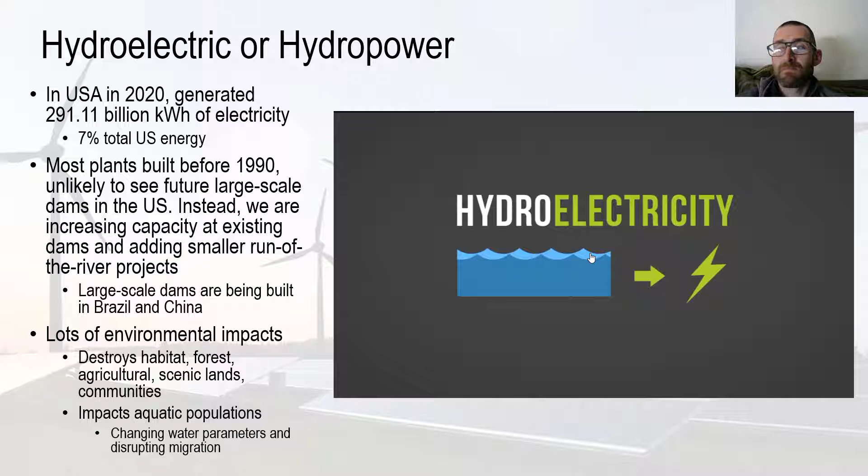Hydropower, or hydroelectricity, refers to the conversion of energy from flowing water into electricity. It is considered a renewable energy source because the water cycle is constantly renewed by the sun. One of the first uses of hydroenergy was for mechanical milling, such as grinding grains.

Today, modern hydro plants produce electricity using turbines and generators. The mechanical energy created by moving water spins rotors on a turbine. This turbine is connected to an electromagnetic generator which produces electricity when the turbine spins.

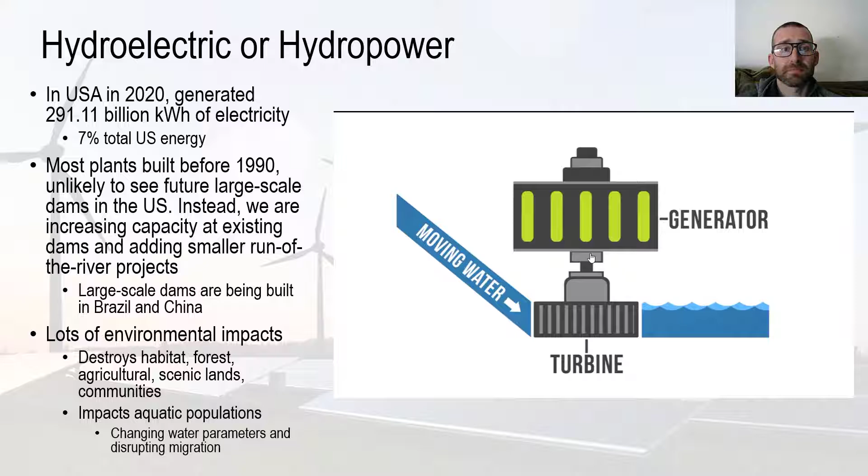There are two main types of hydroelectricity production: dams and run-of-river. Hydro dams utilize the potential energy from dammed water to produce electricity. A dam is a large barrier constructed to raise the level of water and control its flow. The elevation created by the dam creates gravitational force for turning the turbine when water is released.

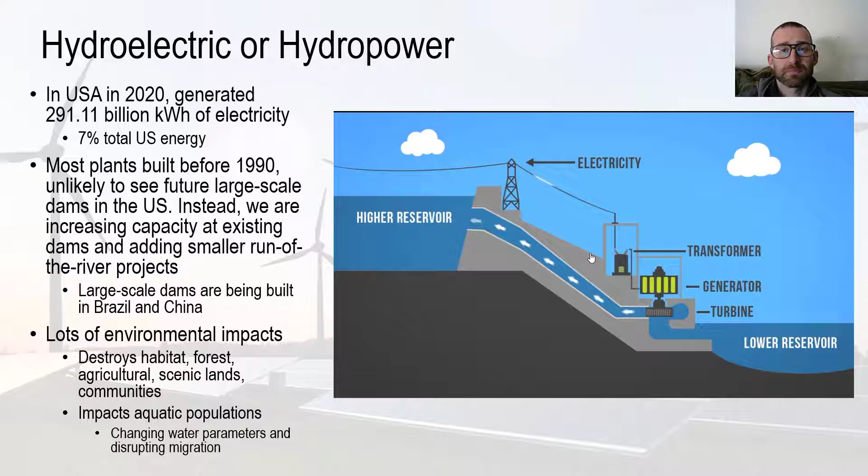Some dams also contain an additional reservoir at their base where water is stored to be pumped to the higher reservoir for release when electricity is in demand. This is referred to as pumped storage hydro.

The second form of hydroelectricity production is run-of-river hydro. Run-of-river still uses turbines and generators, but relies on natural water flow rates of rivers, diverting just a portion of the water through turbines. Because run-of-river hydro is subject to natural water variability, it is more intermittent than dammed hydro.

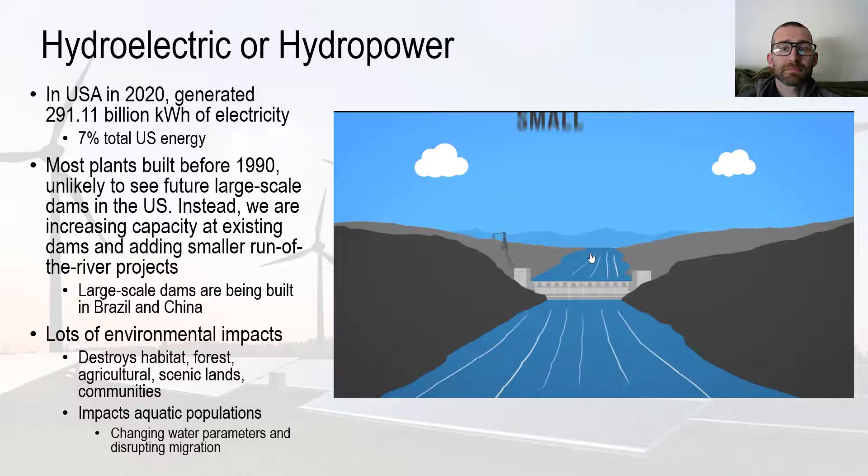There are various sizes of hydro plants that produce electricity: large hydro, greater than 30 megawatts; small hydro, 100 kilowatts to 30 megawatts; and micro hydro, less than 100 kilowatts. The Hoover Dam in the United States is a whopping 2,074 megawatts, which is enough to serve 1.3 million people.

Of all renewable energy sources, hydropower holds the largest share of worldwide electricity production.

Hydropower has several benefits. It is a cost-competitive form of electricity, even though the initial building cost can be high. It is quite reliable compared to other renewable options and pairs well with other sources as it can be used as baseload power. In some cases, dammed reservoirs can also help with flood control and be a reliable water supply for communities.

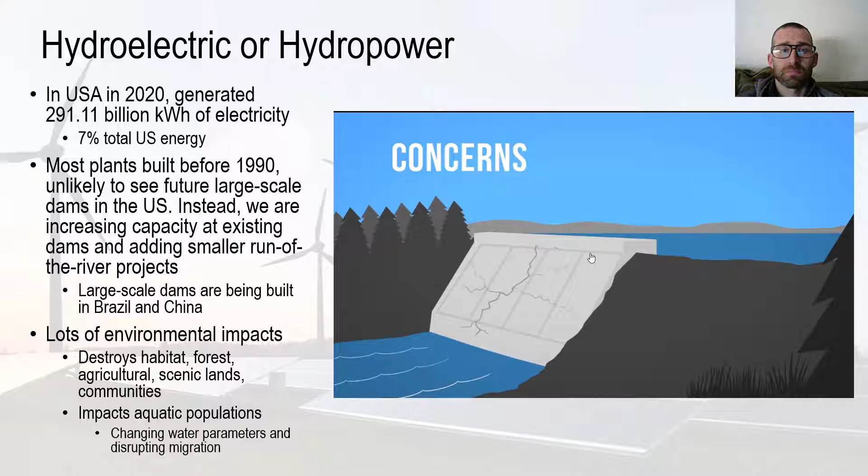There are also some concerns with hydropower, especially when it comes to large dams. Damming a river has a major impact on the local environment, changing wildlife habitats, blocking fish passage, and often forcing people in riverside communities to move out of their homes. In addition, dam failures can be catastrophic, claiming the lives of those living downstream.

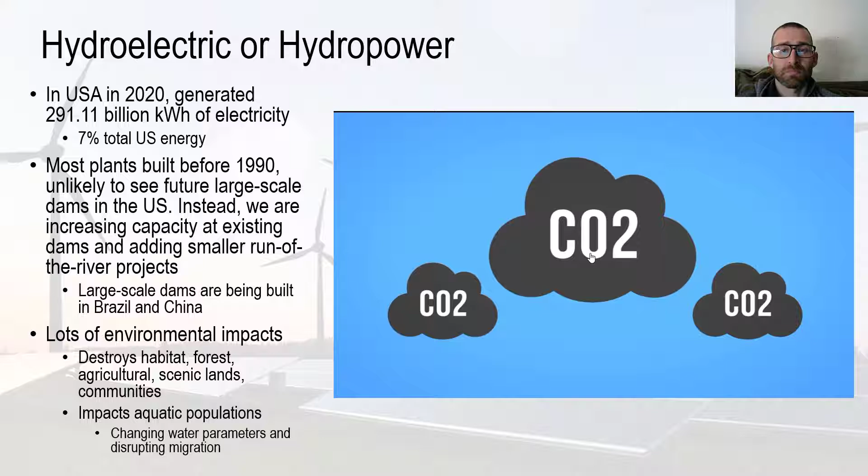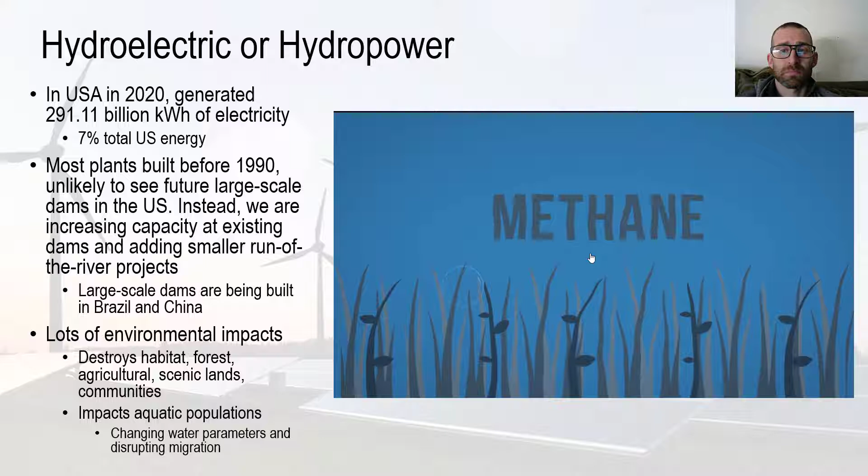Hydro plants are also not completely free of greenhouse gas emissions. As with most forms of energy, carbon dioxide emissions happen during construction, particularly due to the large quantities of cement used, and plant matter in the flooded areas makes methane, another greenhouse gas, as it decays underwater. That's hydropower.

Okay, so I thought that was a really good overview of hydropower or hydroelectric power. A couple things to note: essentially how it works, and this is going to be common through many of these methods, is that whole idea of creating electricity with an electrical generator. It's just, as you recall from the last lecture, moving magnets in that magnetic field, and that creates that electrical current.

You're going to see it with all of these. We already saw it with coal and natural gas and nuclear. And with a majority of these renewables, it's the same idea. We just need to come up with ways of spinning that turbine to create electricity.

So as the video mentioned, it's a couple of years old when this video was produced. Currently, hydropower in the U.S. accounts for about 7% of the total U.S. energy production. I think it was just surpassed by wind, so wind is a little bit higher now.

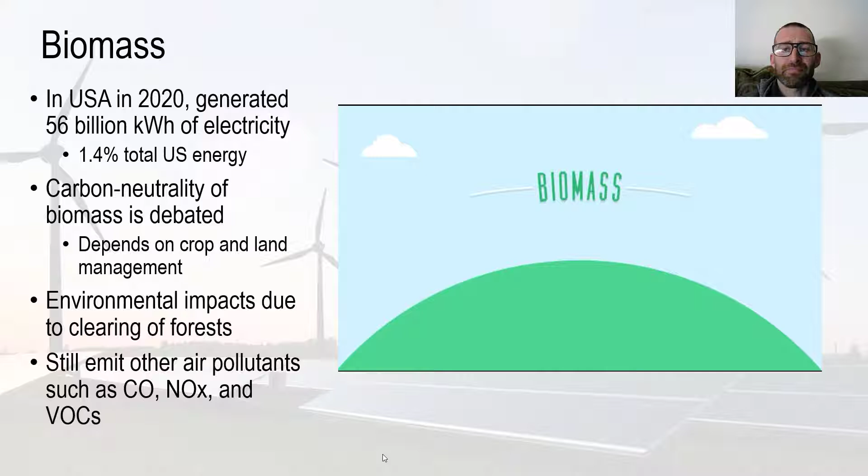It's been part of our lives since our ancestors learned to control fire. In fact, it's made possible by the sun, whose energy is absorbed by trees and plants through photosynthesis, and then released when organic matter is burned or decomposes.

First, there's plant waste. Wood scraps, sawdust, and crop waste can be collected from farms or manufacturers. The waste is burned to heat water. The hot water creates steam. The pressure of the steam spins a turbine. The turbine powers a generator. The generator creates electricity. Simple, really.

Next up, animal waste, also known as the problem of cow poop. The solution? Waste from farm animals can be collected in a large tank called a digester, filled with bacteria that eats the waste and converts it to methane gas. The methane is captured and burned to heat water and create steam. Sound familiar? Second verse, same as the first.

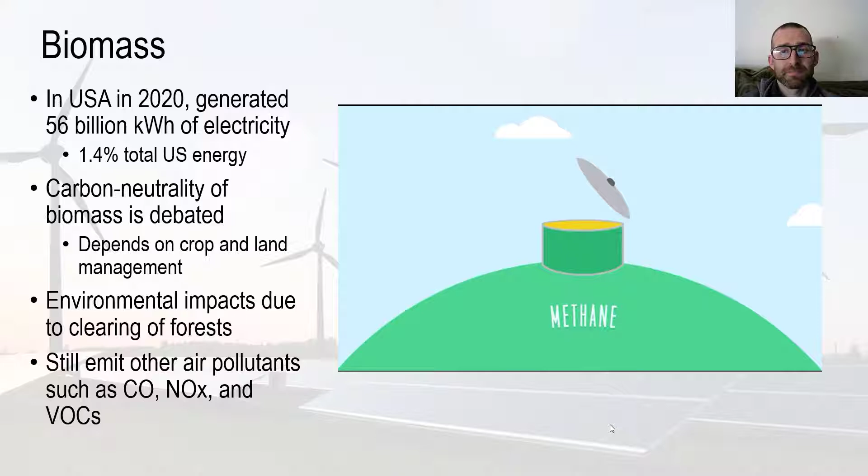This same principle can also be used to capture methane, a potent greenhouse gas with 25 times the heat-trapping ability of carbon dioxide, from landfills. Once a section of the landfill is closed off, pipes are run from the waste to collect the gas, which can then be burned to make electricity or heat.

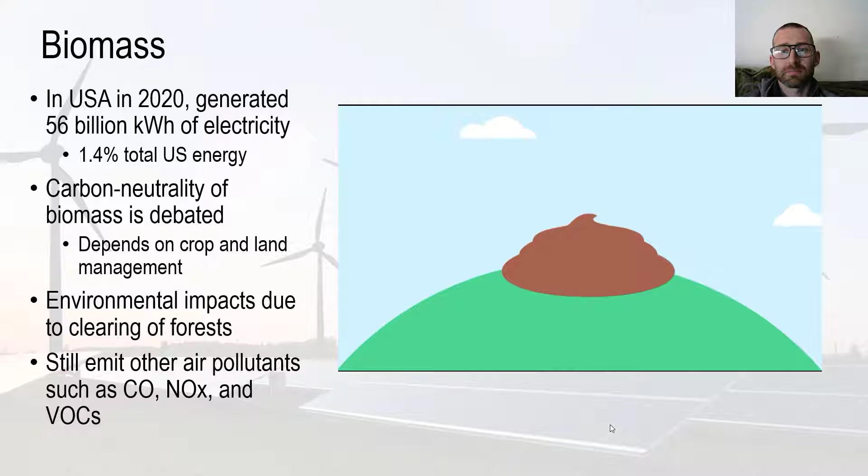Biomass may not be the prettiest form of renewable energy, and it needs to be used carefully and thoughtfully to protect ecosystems and prevent greenhouse gas emissions. But it can be a smart way to make use of waste. Power to the poop.

Okay, so biomass. Again, very similar parallels with the things that we've seen before, right? This is just essentially a different fuel source, same type of process. So instead of burning coal, we're burning waste, vegetable matter, wood, etc.

Now, biomass currently in the U.S., at least in 2020, was about 1.4% of our total U.S. energy production, so not a whole ton.

The carbon neutrality and the environmental friendliness of this technique is debated, and it really depends on your crop and land management. So if we are cutting down forests to be used for biomass, that's maybe not the best method or the most environmentally friendly method.

But this is, I think, a really good way of utilizing different waste streams. We produce a lot of waste in this country, and this could be a way of taking that waste that would otherwise just go to a landfill and utilizing it to create energy.

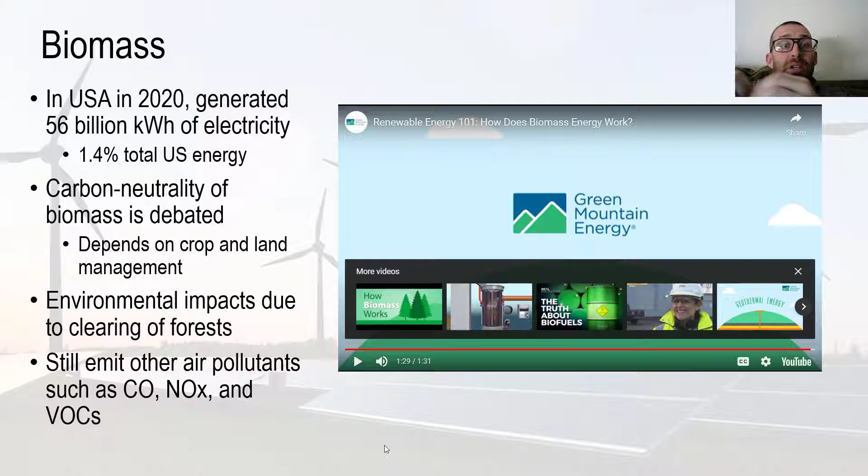Right now, we're still burning things, so we're still going to emit other air pollutants, like we see with burning other carbons, fossil fuels being carbon-based. But if we do this smartly and thoughtfully, this is a more environmentally friendly and could be a carbon neutral process of generating electricity.

No. And here's a quick video, we'll watch it real fast, of like I talked about. I think where we see a real benefit, or could see a real benefit with biomass, is for recycling and waste management. And here's just a little renewable example of that.

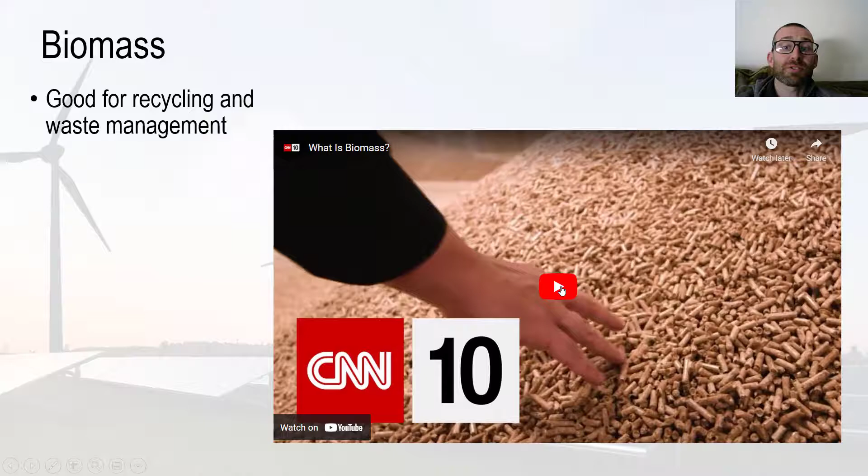Biomass generates less than 2%. Harvesting it, moving it, storing it, making sure it produces a consistent amount of energy, those have been ongoing challenges for scientists looking to use biomass. But the biomass industry is hoping to change that.

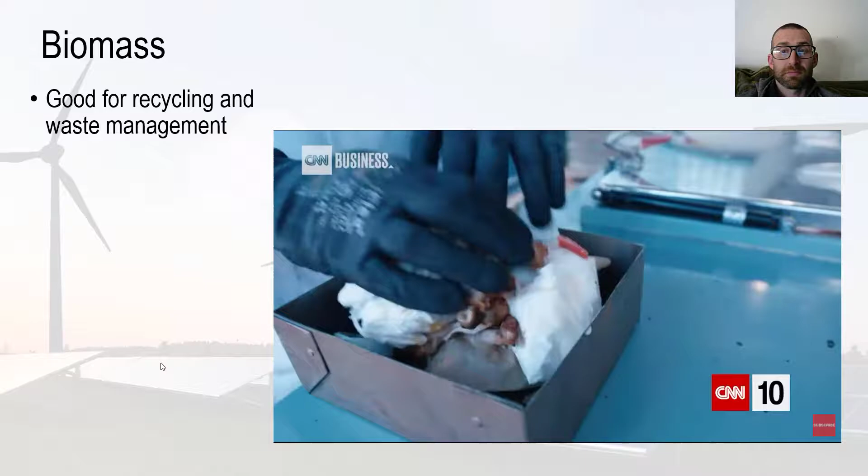There's so many non-utilized waste streams in this world. We have food waste, we have transportation waste. There are endless amounts of byproducts that are currently not utilized. What if you could power your home and live completely off the grid by just using your own trash?

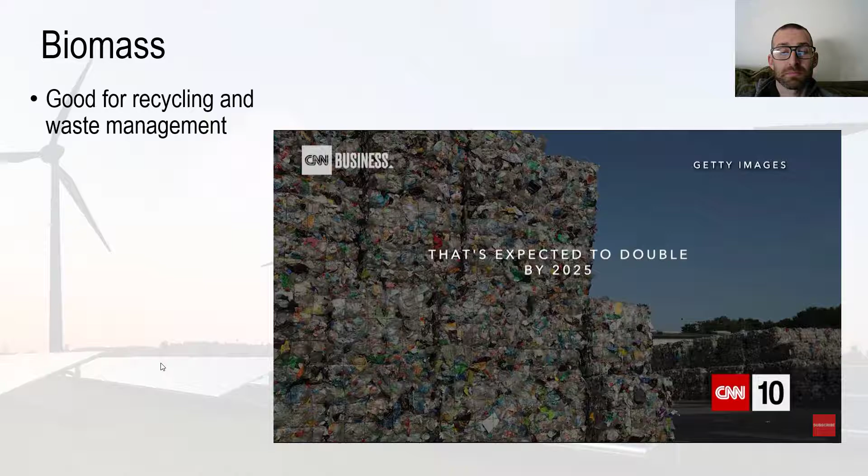Each year, over 1 billion tons of solid waste is produced globally. That's expected to double by 2025. And of the 8.3 billion metric tons of plastic produced worldwide, only 9% is recycled. But to this German startup, our trash is their treasure.

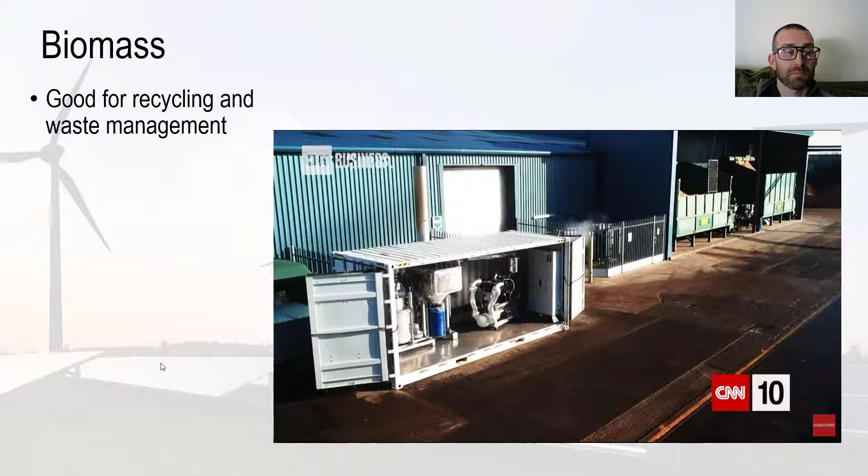The initial vision that we had was to build a power plant that is truly mobile, that it can convert all the waste and turn it into clean energy right on site. Entrade's power plants can fit entirely inside a 20-foot shipping container and mainly run on biomass. Biomass is a renewable organic resource that comes from plants and animals and can be turned into fuel.

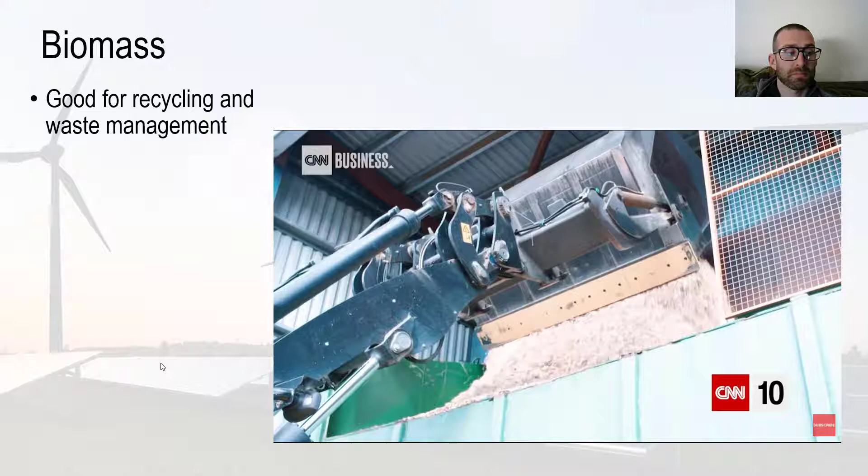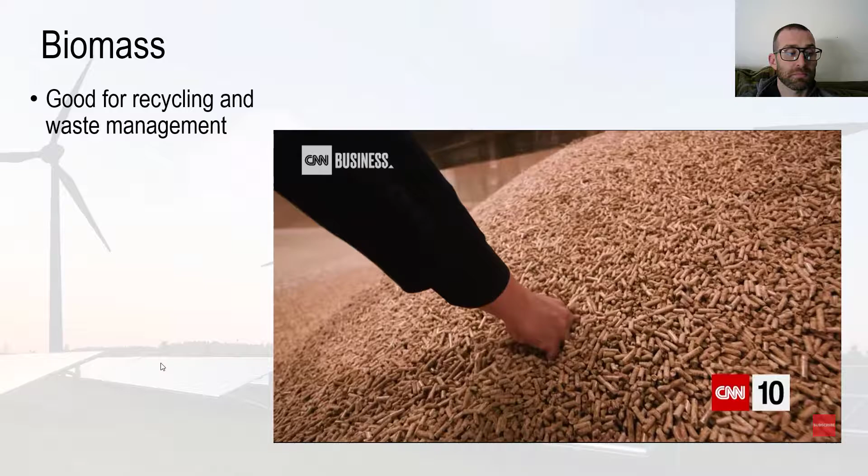Uhlig and his team work to identify local waste streams. Anything from manure to discarded lumber to yard trimmings, and even peanut shells can do the trick. We crush it, we dry it, and then we pelletize it. These biomass pellets are what Entrade's power units run on. The company has also developed the technology to use non-organic waste as fuel.

By taking plastic that would otherwise end up in landfills and combining it with other green waste, they claim their units can produce enough electricity to power homes, neighborhoods, and factories. We put it into our reactor, and it only stays there for a few seconds before it totally converts into a natural gas replacement.

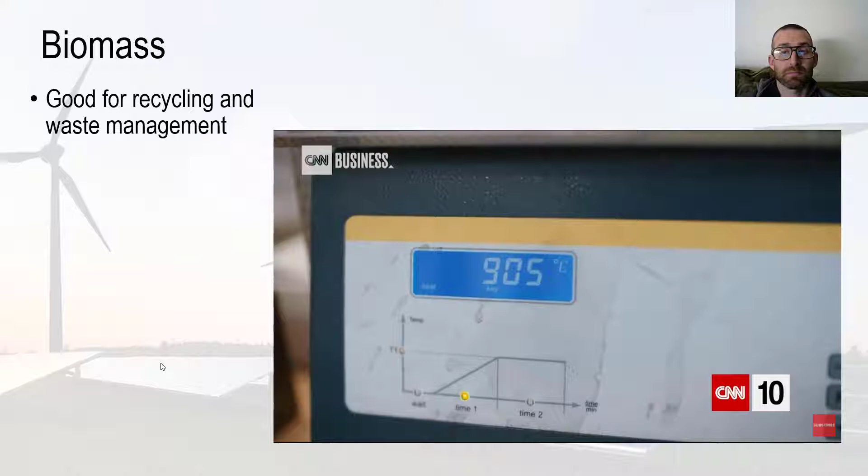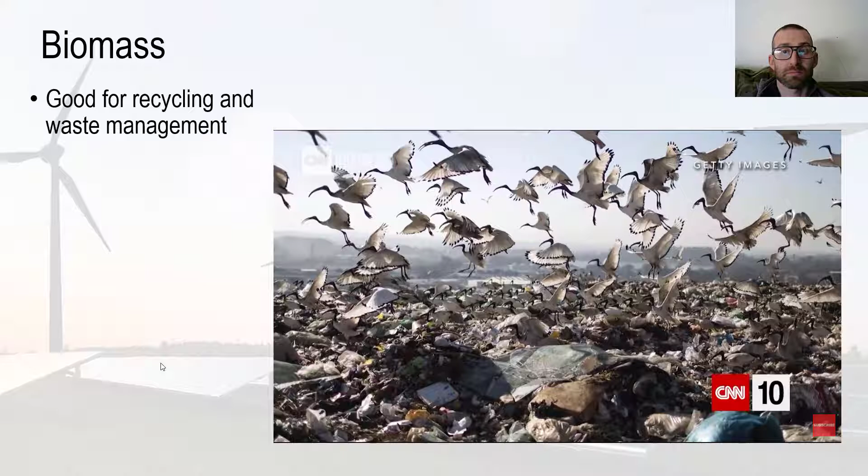It's a process called gasification. When plastic goes into a small reactor, it burns at extremely high temperatures, breaking down its polluting particles. The result is a hot gas that is then used to create electricity. Entrade sees potential in countries dealing with large amounts of plastic pollution. But figuring out the right mixture of plastic and biomass can be complicated and is still being tested.

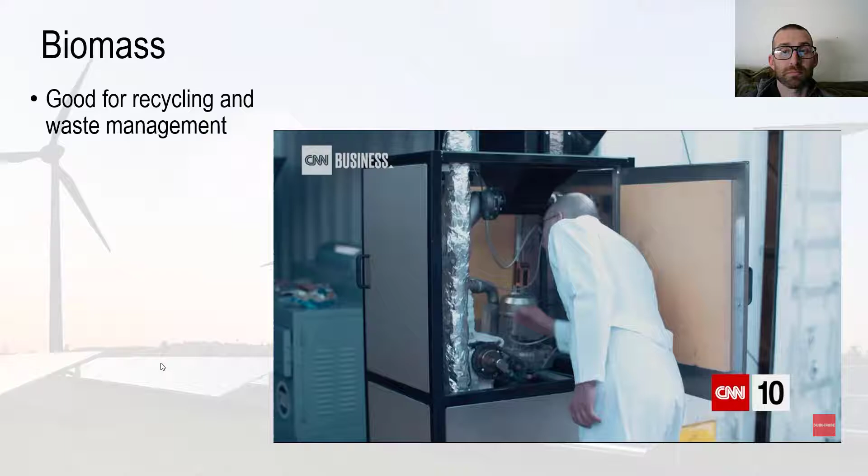The company wants to take their mobile power units one step further. Their newest unit is a mini power plant about the size of a fridge. We were always thinking of this power unit you can bring to the middle of nowhere, plug it in, use all the waste you find around it, pelletize it, and you have a complete power supply on site. I can see many people in farmhouses all over the world just putting this next to their kitchen and generating their own power from the waste that they're currently throwing away.

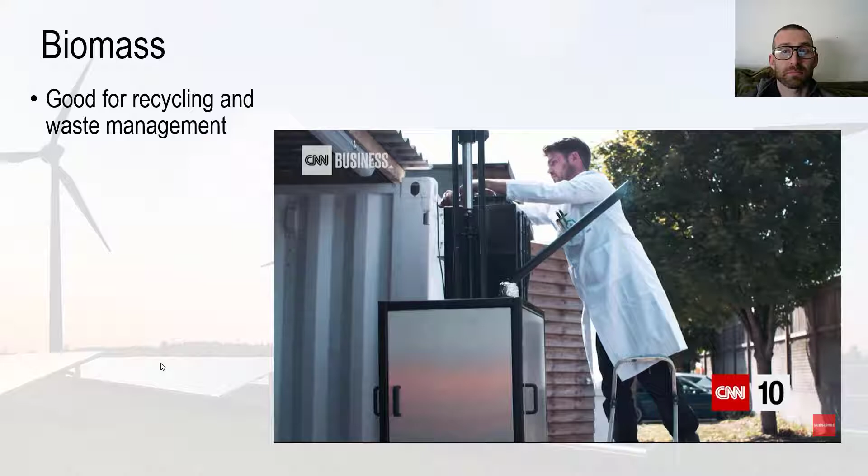But are these mini units as easy to use as they seem? If you look at the bags of pellets that we produce here, we need about 2 to 3 bags per day, so you can actually fill it by hand in the morning and have a complete power supply around the clock. That's a lot of pellets.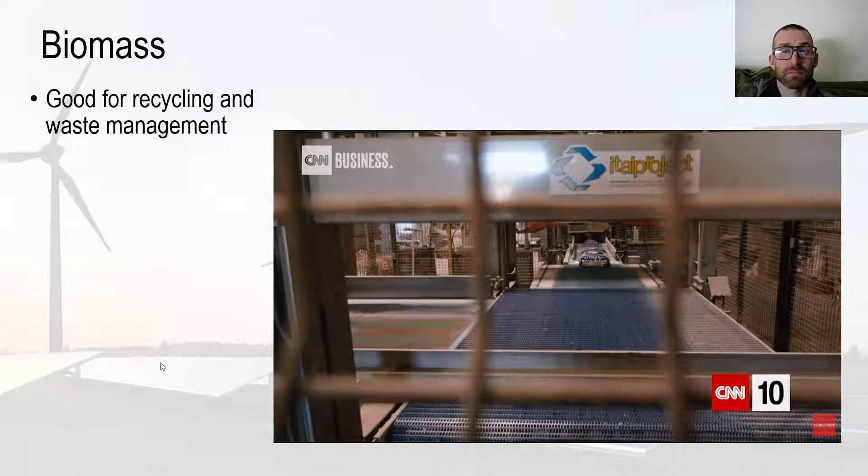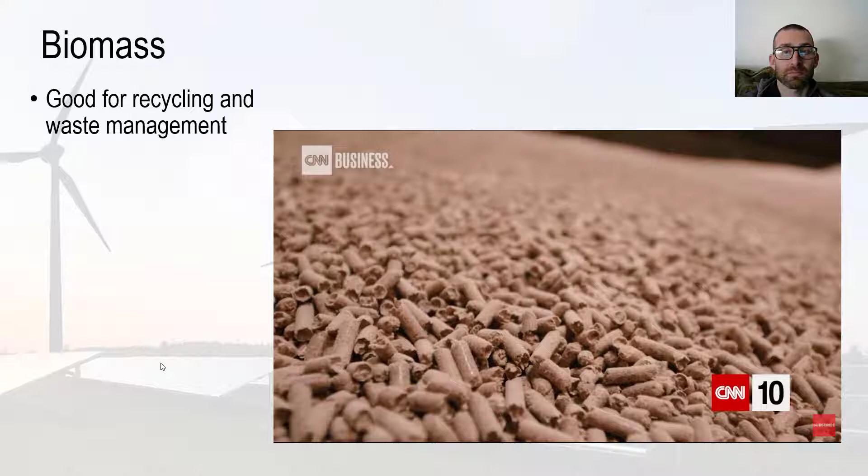Entrade's off-the-grid vision is still in its early phases. Questions like how much energy it would take for someone to actually make these pellets at home still remain. The company envisions communities combining their green waste and making their own biomass fuel.

They're also working to make these things affordable. The 50 kilowatt unit that you find in a big container was initially about $5 million to build. We have brought this down to a retail price of $250,000. As the production numbers go up, we think we can offer this for the price of a small car.

Entrade hopes that mini power plants like these could change the way cities and towns source their electricity, making them self-sustaining, and in some cases, cleaner. You're going to have communities processing their own waste using its electricity, and it's totally going to revolutionize the way we're going to live.

Kind of neat, right? So I thought that was cool.

Again, I think as they kind of touch on, where biomass could be really great is as this waste management process or technique. And really what you see here starts to touch on why we need to update our grid.

Where most people involved in energy, scientists, policymakers, etc., see things going in the future with energy is instead of having our current system where we have these large-scale power plants that are producing the majority of our energy and our electricity, and then that's getting distributed, we're going to have more of these smaller little microgrids.

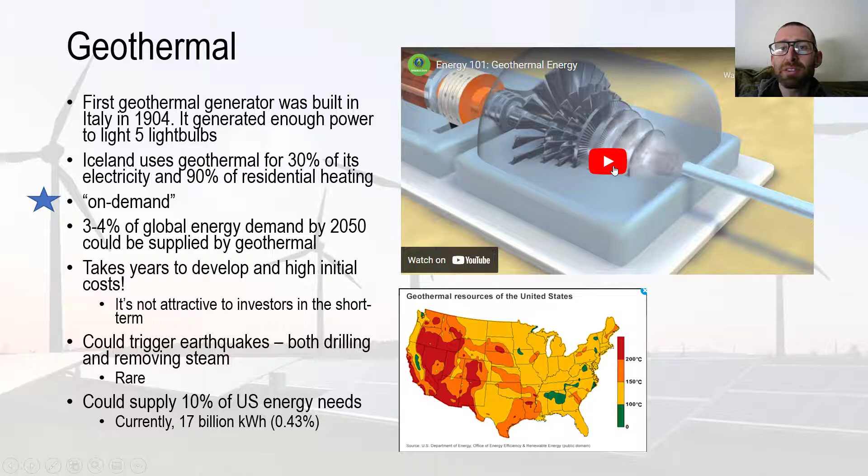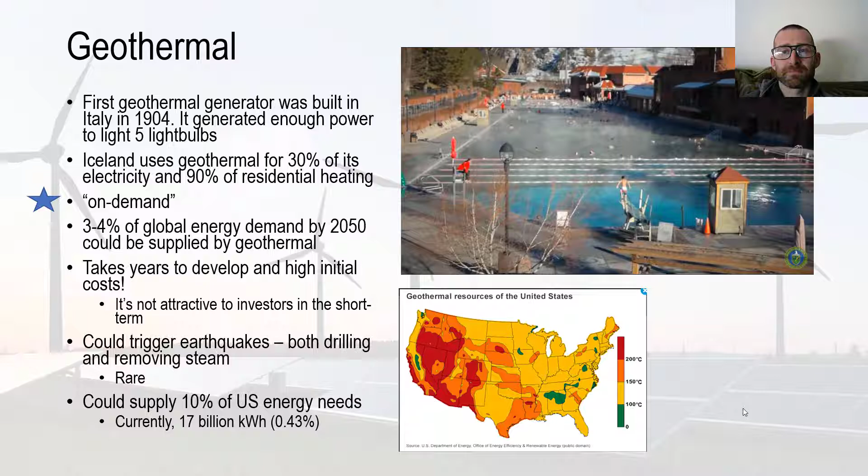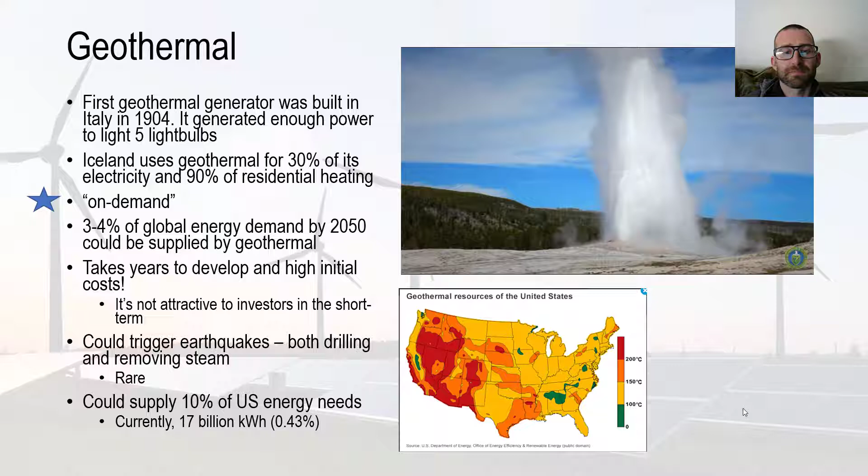You may have relaxed in a natural hot springs pool, or seen the Old Faithful geyser blasting hot water into the air in Yellowstone National Park. But have you ever thought of where all that heat comes from? Well, it comes from deep beneath the surface of the Earth, and it's called geothermal energy. And we can use it to generate clean, renewable electricity.

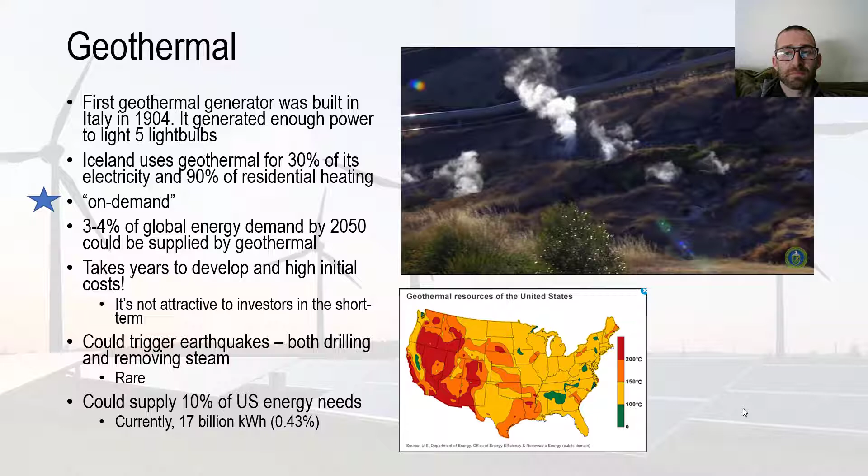Okay, here's how geothermal works. Heat from the Earth's crust warms water that has seeped into underground reservoirs. In some places, when water becomes hot enough, it can break through the Earth's surface as steam or hot water. This usually happens where the Earth's crust, or plates, meet and shift. In the past, taking advantage of geothermal energy was limited to areas where hot water flowed near the surface. But as geothermal technologies advance, we can leverage even more of these natural, renewable energy sources.

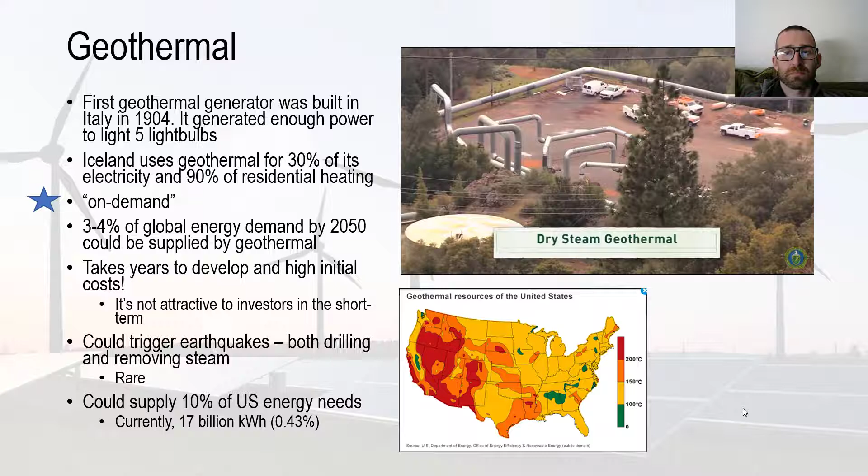Engineers have developed a few different ways to produce power from geothermal wells drilled into the ground. Have a look at this. It's a dry steam geothermal power plant, and it's the oldest type of geothermal technology used today. Underground steam flows directly to a turbine to drive a generator that produces electricity.

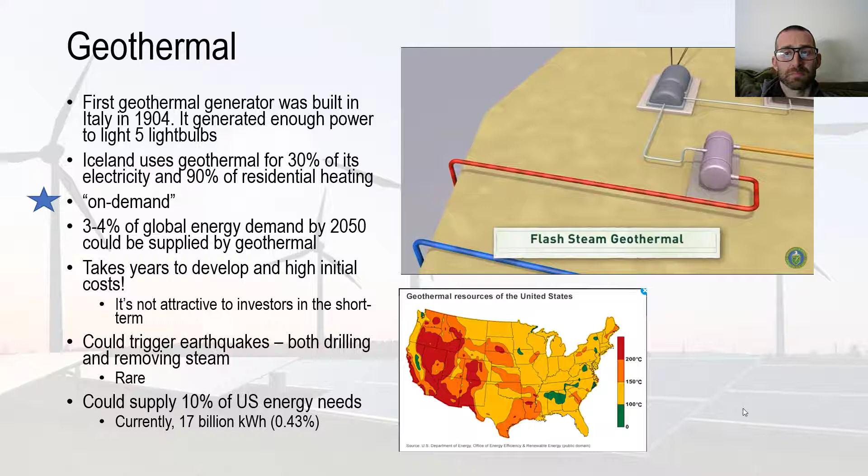Pretty straightforward. Another geothermal technology is called a flash steam power plant. A pump pushes hot fluid into a tank at the surface, where it cools. As it cools, the fluid flashes, or quickly turns into vapor. The vapor then drives a turbine and powers a generator.

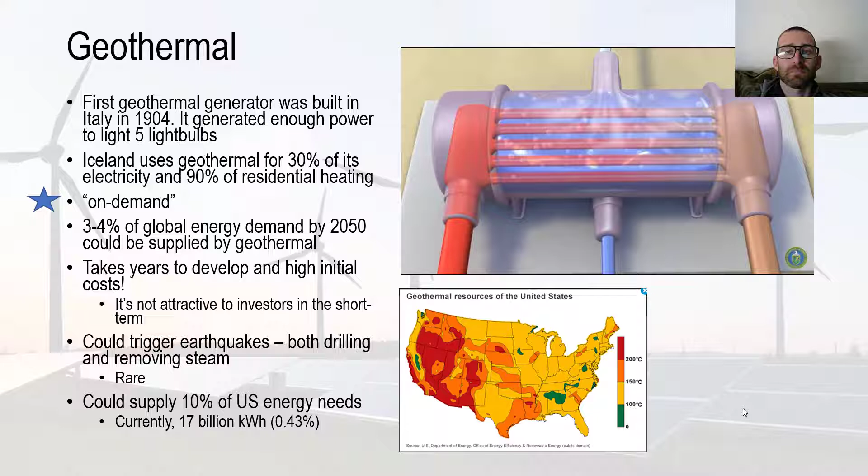A binary cycle plant works differently. It uses two types of fluid. Hot fluid from underground heats a second fluid, called a heat transfer fluid, in a giant heat exchanger. The second fluid has a much lower boiling point than the first fluid, and so it flashes into vapor at a lower temperature. When the second fluid flashes, it spins a turbine that drives a generator.

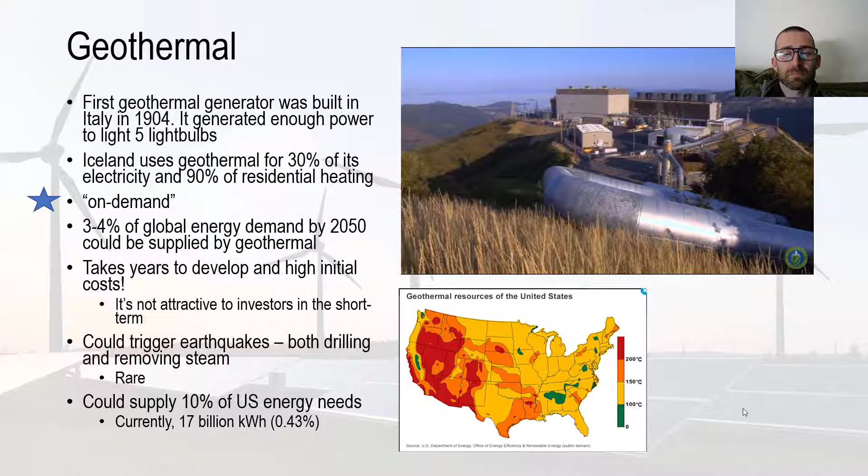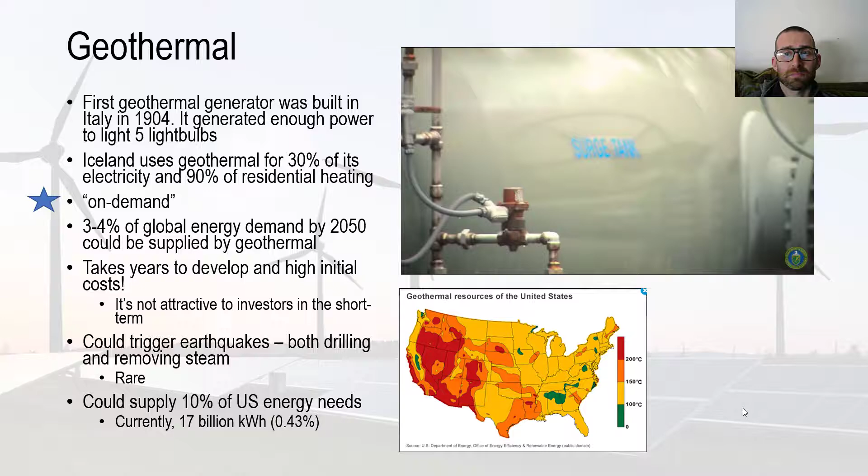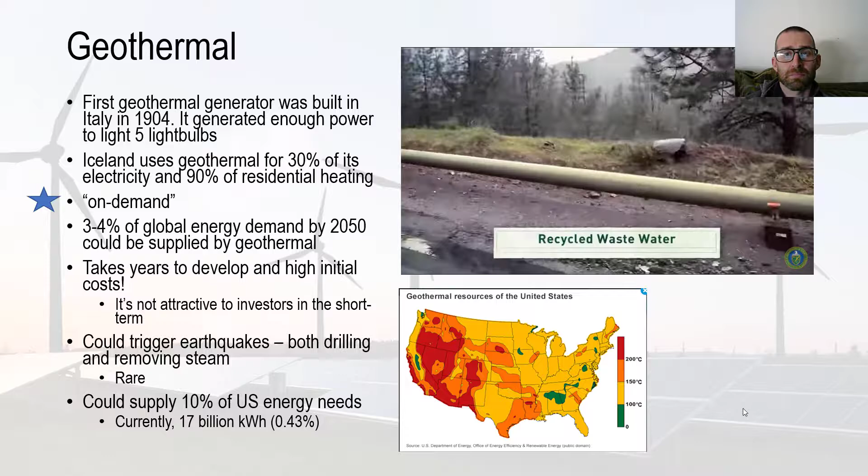The environmental benefits of this clean, round-the-clock, renewable energy source are substantial. Low emissions, small physical footprint, and minimal environmental impact. The few byproducts that can come up are often re-injected underground. Geothermal energy can also help recycle wastewater. In California, wastewater from the city of Santa Rosa is injected into the ground to generate more geothermal energy. Some plants do produce solid waste, but that solid waste may contain minerals that we can remove and sell, which lowers the cost of this energy source.

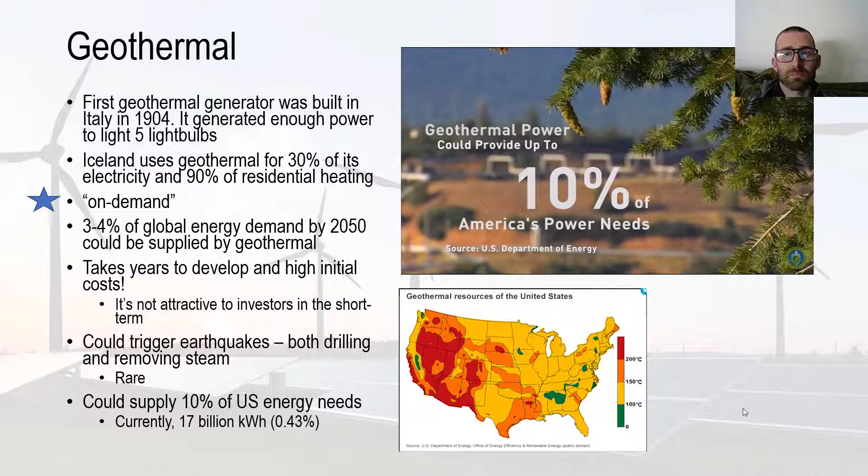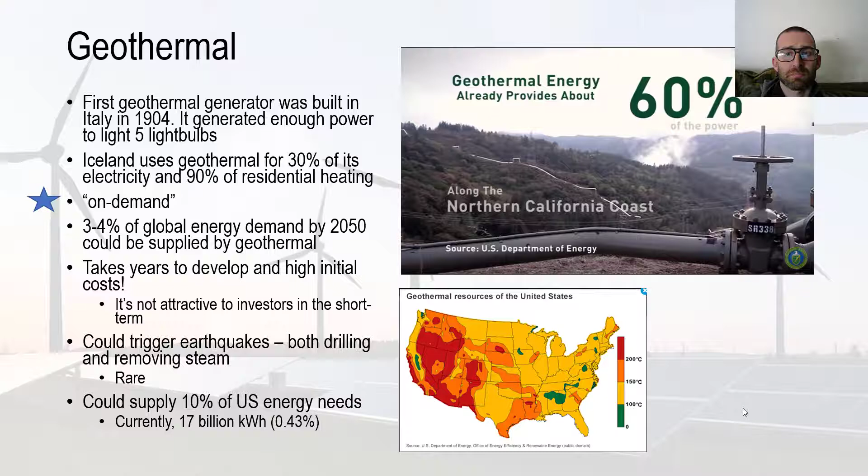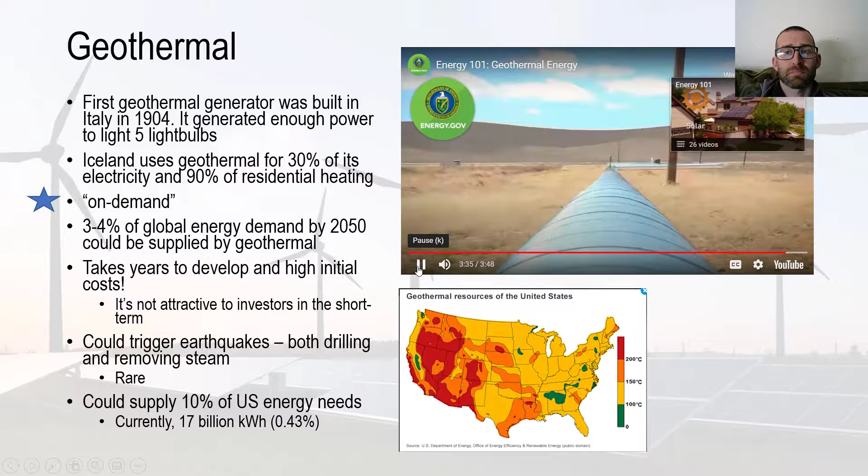The U.S. Department of Energy estimates that untapped geothermal resources in the United States, if developed, could supply the equivalent of 10% of today's energy needs and cut our dependence on fossil fuels. In fact, electricity generated by geothermal energy already provides about 60% of the power along the Northern California coast, from the Golden Gate Bridge to the Oregon state line. Geothermal energy, helping to push America toward energy independence and a clean, renewable way to meet our growing energy demands.

Okay, so that's geothermal. Again, same idea, right? We just need to create steam, or we need to turn that turbine in one way or another. Now, with geothermal, instead of actually burning materials, burning fossil fuels, or burning biomass, we're using the natural heat of the earth to create that steam, to spin that turbine. I think it's a really neat form of energy generation.

The first geothermal generator was built in Italy in 1904, and it was able to power 5 light bulbs. So there's been a great increase in the ability of this technique to create energy since that first generator back in the early 1900s.

And this is, like they said, in California, it is used widely in certain areas. In Iceland, they're probably the most well known for their geothermal energy. Iceland uses geothermal, and that accounts for about 30% of their electricity generation and 90% of their residential heating. They really went kind of all in and promoted this method.

This really followed the 1970s. Before they decided to switch or go for geothermal, they were primarily fossil fuel based and oil based, and there was an oil shortage in the 70s where they couldn't get any to Iceland. It was a worldwide oil shortage. Iceland couldn't get any oil, and they realized they needed to shift their processes and how they went about creating energy. They decided to go geothermal, taking advantage of the natural geology in the area. And it's been a great success, right? They are well known for producing geothermal energy.

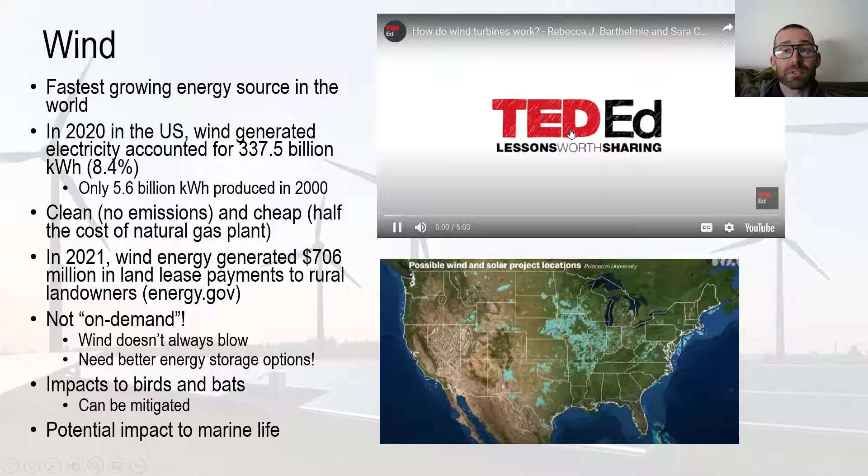Every 24 hours, wind generates enough kinetic energy to produce roughly 35 times more electricity than humanity uses each day. And unlike coal or oil, this resource is totally renewed each day. So how can we harness this incredible amount of energy? And is it possible to create a world powered entirely by wind?

The basic principle of wind energy is simple. A series of sails or blades mounted around a rotor catch the wind and translate its kinetic energy into rotational energy. Traditional windmills use that rotational energy to grind wheat or pump water. But in modern wind turbines, it turns a generator that creates electricity.

This conversion from wind to rotational energy to electricity has defined wind turbines since their invention in the late 19th century. And there are three primary factors that determine just how much energy they can produce: the size and orientation of the blades, aerodynamic design, and the amount of wind turning the rotor.

First up, blade orientation. Wind turbines can be designed with their rotor on a vertical axis or a horizontal axis. Vertical blades can pick up wind coming from any direction, but with much less efficiency than horizontal axis rotors. Horizontal designs allow blades to capture the wind's full force by tracking the wind's direction and turning to face it. This turning process is called yawing, and older windmills achieved it through manual monitoring. Today, wind sensors and computer systems automatically adjust the blades with expert precision to capture as much energy as possible.

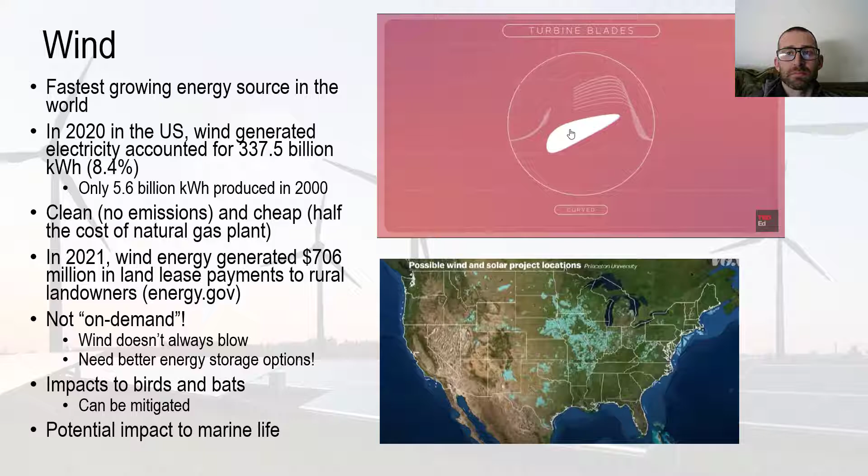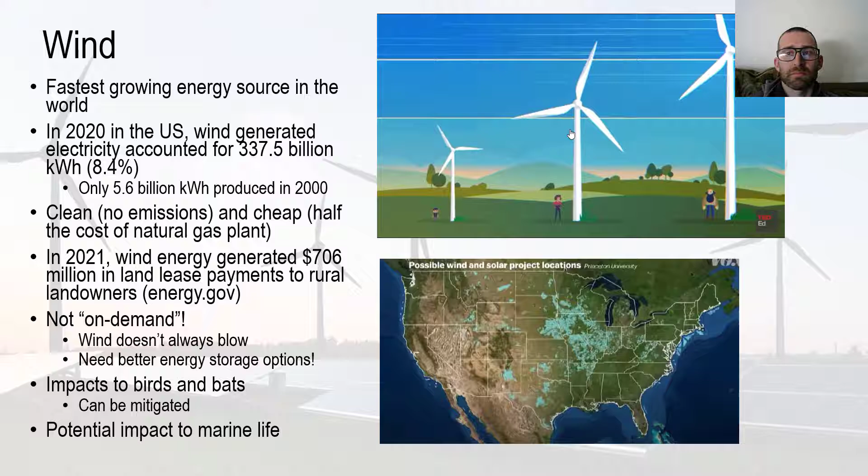Made of fiberglass and resin layers, these blades are strong enough to operate through rain, lightning, and blistering sunlight for over 20 years. Even with aerodynamic blades and a horizontal rotor, a wind turbine can only capture wind if it's in a windy environment. Wind speeds typically increase the higher into the atmosphere you travel. So today, most turbines are well over 100 meters tall, with equally large rotor diameters. A turbine of this height and size can capture a huge amount of wind, generating enough electricity every year to power 750 American homes.

A wind farm of 200 similarly sized turbines could power over 150,000 American homes, or twice as many European homes, for an entire year. Offshore wind farms contain an even greater number of even larger turbines. In 2019, the largest wind turbine ever built began operating off the coast of the Netherlands. With a rotor diameter of 220 meters, just one of these turbines can meet the annual power needs of 16,000 European households. Despite its amazing potential, wind energy still faces challenges.

Wind may be a free and unlimited fuel, but no matter how large or efficient a turbine is, there's a mathematical limit to how much wind it can convert into electricity. German physicist Albert Betz calculated that since some wind must remain to keep the blades spinning, a turbine can only ever capture 59.3% of the wind's energy.

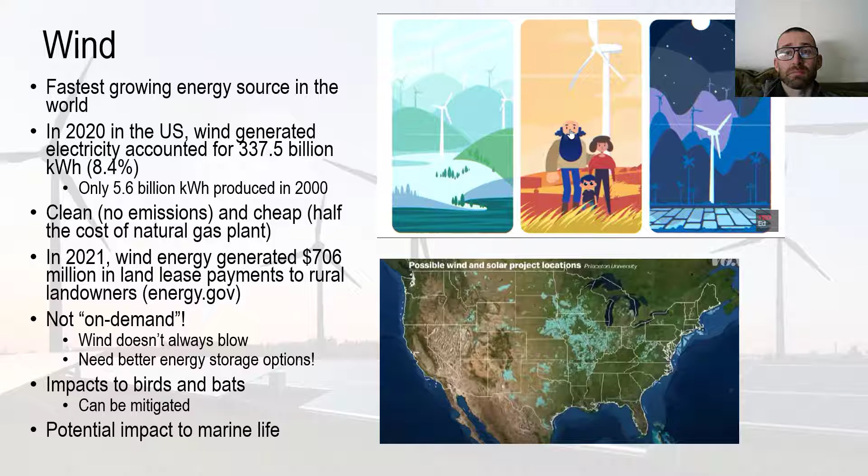Additionally, some people feel turbines disrupt natural scenery, and wind energy's intermittent availability can make it difficult to integrate into electrical grids. But even with these challenges, modern wind turbines have made wind energy the most efficient and inexpensive source of electricity. Wind turbines already provide essential energy for communities around the world, and for many farmers, hosting a wind turbine can be a reliable source of additional income. With continued improvements in wind forecasting, electrical grid infrastructure, and energy storage, wind power might blow away all our energy problems.

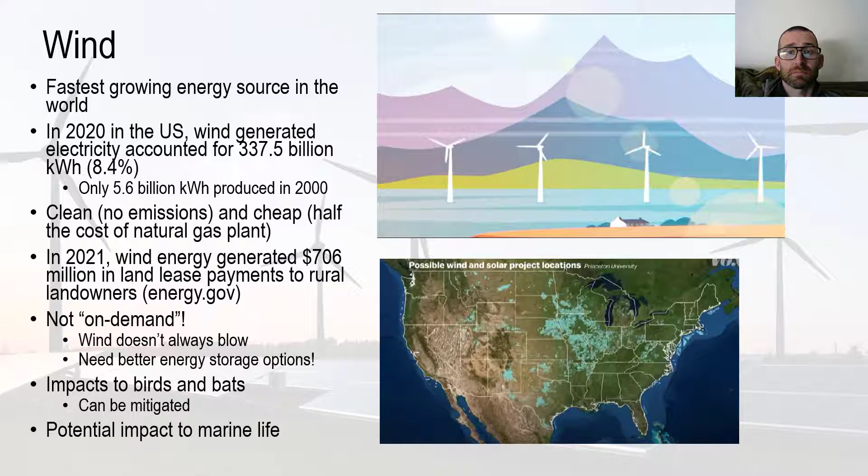Next up, learn how solar...

Okay, so that's wind. It is the fastest growing energy source in the world, right?

And for good reasons that were touched on in that video. It is clean, right? There are no emissions associated with wind power, and it's cheap. The costs of wind have decreased dramatically. The cost of developing a wind farm is about half the cost of building a natural gas plant, so it's cheaper than all these other sources of energy generation.

And because of that, we are seeing this huge increase in wind development. In 2020, in the U.S., wind generated about 8.4% of our energy capacity, or about 337.5 billion kilowatt hours. Only 20 years ago, that number was 5.6 billion. So a huge increase in the amount of wind and electricity that we're generating through wind.

Another benefit, besides it being clean and cheap, is that it also can be a source of income, especially for rural areas. If you look at possible wind and solar locations, a lot of them are out in the Midwest, traditional farm country. Well, here's an additional form of income now. If you can utilize some of your land and lease it for these wind projects, it'll generate extra income for you. In fact, in 2021, wind energy generated $706 million in land lease payments to rural landowners. So another advantage of wind.

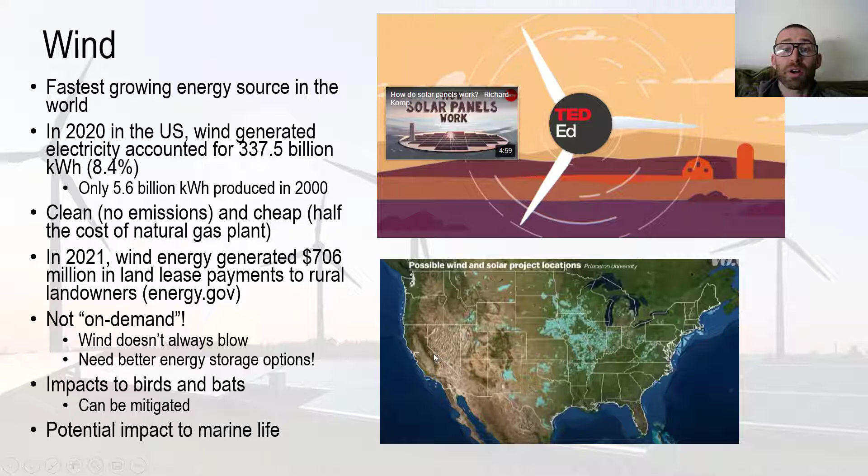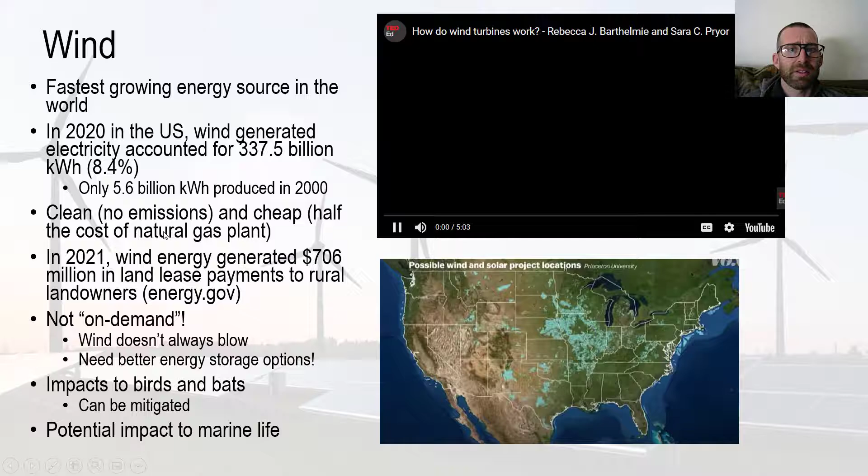And that is going to bring us to solar energy. Our last renewable, solar, and also probably right behind wind in terms of growth. Before we watch the video, I'll just touch briefly. It accounted for about 8.4% of our... oh, that's still the wind, that should be changed. I'll have to look it up and tell you how much electricity it accounted for. Oh, this is correct, it's just the 8.4% is wrong. Oh no, I can't change it while I'm on here.

Okay, so in the US, solar power or solar photovoltaic power generated 90.9 billion kilowatt hours of electricity. I'm not sure what percentage that is, but again, this is a big increase compared to only a couple of years ago. In 2010, only about 10 years ago, we only produced 1.2 billion, and going back 20 years ago, it was about 0.5. So this is rapidly growing, just like wind, a rapidly growing energy source.

So let's watch our video, and then I'll touch on a couple more things.

The Earth intercepts a lot of solar power, 173,000 terawatts. That's 10,000 times more power than the planet's population uses. So is it possible that one day the world could be completely reliant on solar energy?

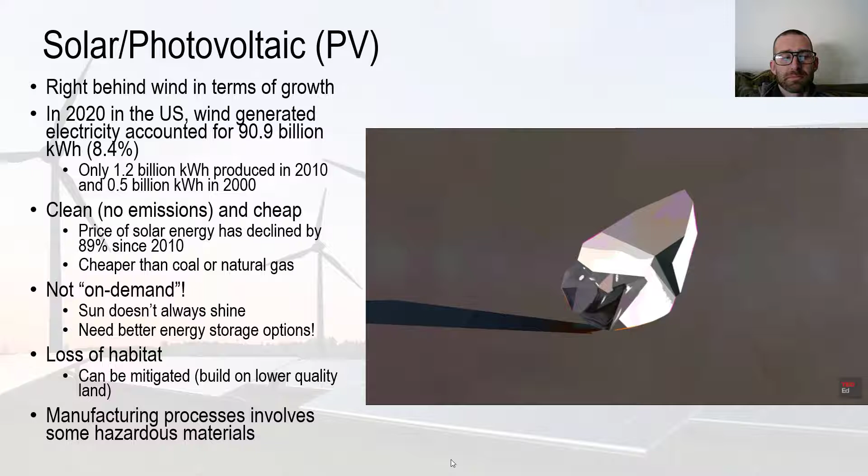To answer that question, we first need to examine how solar panels convert solar energy to electrical energy. Solar panels are made up of smaller units called solar cells. The most common solar cells are made from silicon, a semiconductor that is the second most abundant element on Earth. In a solar cell, crystalline silicon is sandwiched between conductive layers. Each silicon atom is connected to its neighbors by 4 strong bonds, which keep the electrons in place so no current can flow.

Here's the key: a silicon solar cell uses 2 different layers of silicon. N-type silicon has extra electrons, and P-type silicon has extra spaces for electrons, called holes. Where the 2 types of silicon meet, electrons can wander across the p-n junction, leaving a positive charge on one side and creating negative charge on the other.

You can think of light as the flow of tiny particles called photons shooting out from the sun. When one of these photons strikes the silicon cell with enough energy, it can knock an electron from its bond, leaving a hole. The negatively charged electron and the location of the positively charged hole are now free to move around. But because of the electric field at the p-n junction, they'll only go one way. The electron is drawn to the n side, while the hole is drawn to the p side.

The mobile electrons are collected by thin metal fingers at the top of the cell. From there, they flow through an external circuit, doing electrical work like powering a light bulb, before returning through the conductive aluminum sheet on the back.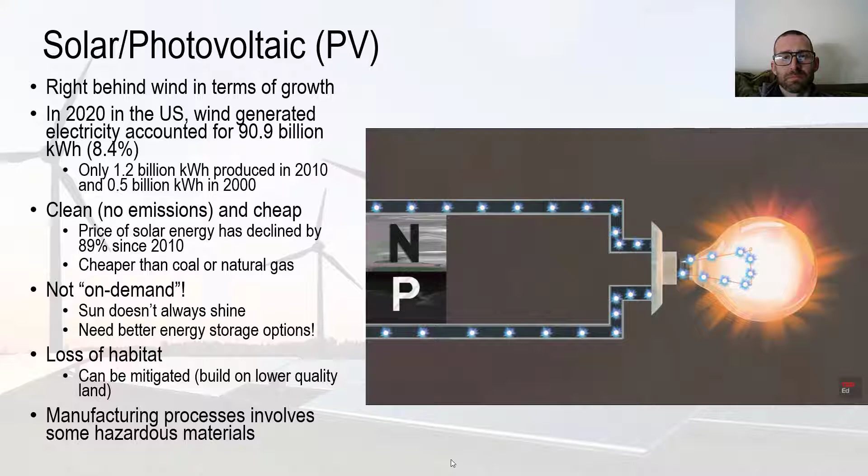Each silicon cell only puts out half a volt, but you can string them together in modules to get more power. 12 photovoltaic cells are enough to charge a cell phone, while it takes many modules to power an entire house. Electrons are the only moving parts in a solar cell, and they all go back where they came from. There's nothing to get worn out or used up, so solar cells can last for decades.

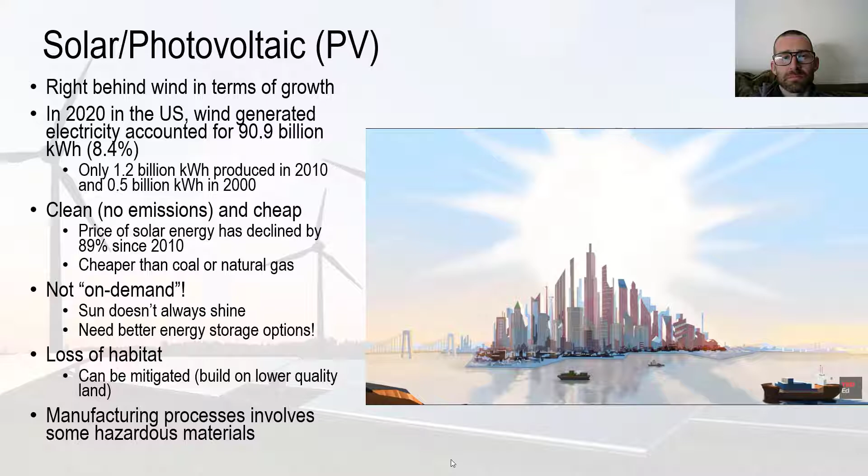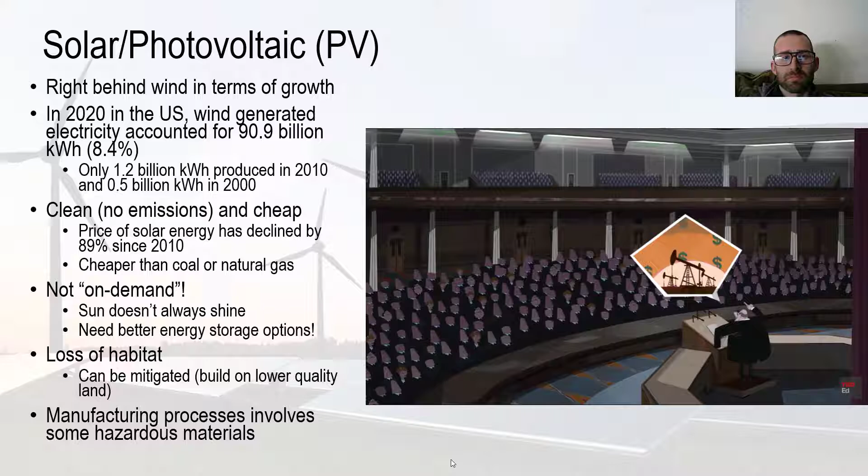So what's stopping us from being completely reliant on solar power? There are political factors at play, not to mention businesses that lobby to maintain the status quo. But for now, let's focus on the physical and logistical challenges. And the most obvious of those is that solar energy is unevenly distributed across the planet. Some areas are sunnier than others.

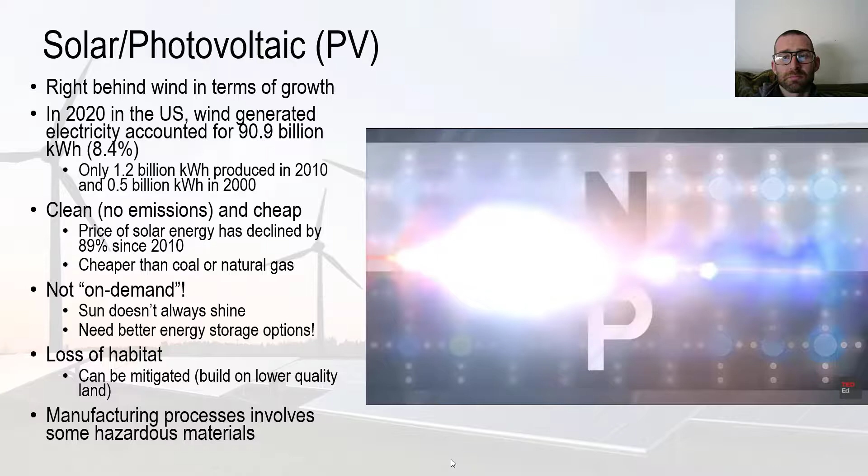It's also inconsistent. Less solar energy is available on cloudy days or at night. So a total reliance would require efficient ways to get electricity from sunny spots to cloudy ones, and effective storage of energy. The efficiency of the cell itself is a challenge too. If sunlight is reflected instead of absorbed, or if dislodged electrons fall back into a hole before going through the circuit, that photon's energy is lost.

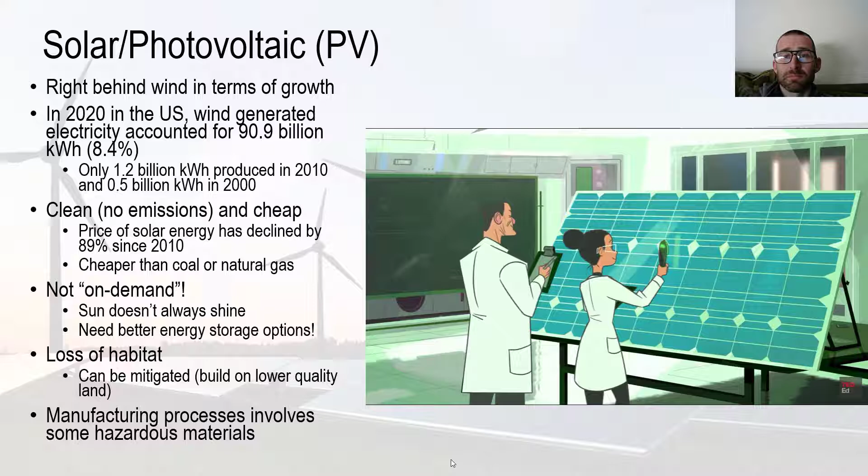The most efficient solar cell yet still only converts 46% of the available sunlight to electricity, and most commercial systems are currently 15 to 20% efficient.

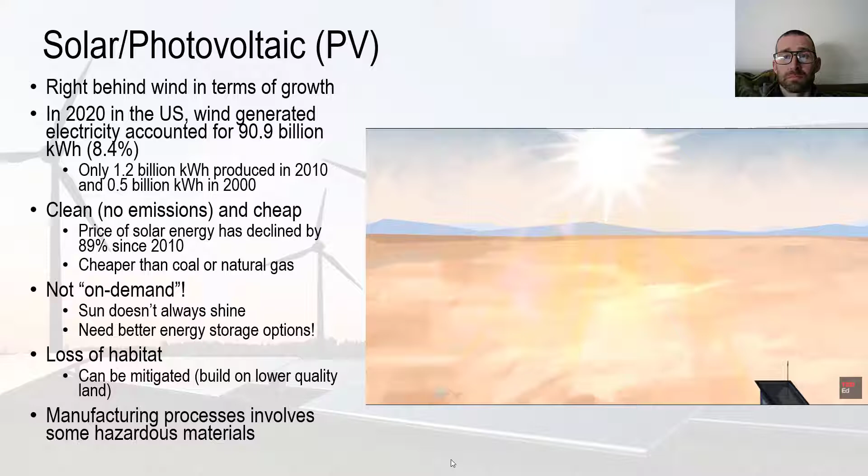In spite of these limitations, it actually would be possible to power the entire world with today's solar technology. We'd need the funding to build the infrastructure and a good deal of space. Estimates range from tens to hundreds of thousands of square miles. Which seems like a lot, but the Sahara Desert alone is over 3 million square miles in area.

Meanwhile, solar cells are getting better, cheaper, and are competing with electricity from the grid. And innovations like floating solar farms may change the landscape entirely.

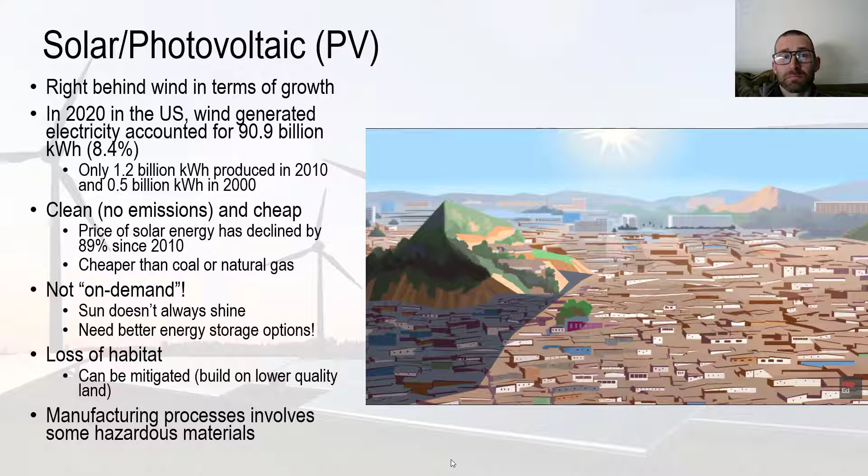Thought experiments aside, there's the fact that over 1 billion people don't have access to a reliable electric grid, especially in developing countries, many of which are sunny. So in places like that, solar energy is already much cheaper and safer than available alternatives like kerosene. For, say, Finland or Seattle, though, effective solar energy may still be a little way off.

All right, so that's solar. I wanted to show that one, and I saved it for last because this is a different type of electricity generation, right? Almost all the other ones were that electromagnetic induction. We needed something to turn that turbine, to spin that rotor, to create that magnetic field, to create that electric current. This is different, right? It's a different process. This is something, it's a little more akin to how a battery works. So just something to be aware of, right?

Now, as they mentioned, solar is a great option going forward, right? It is clean, no emissions, it is cheap. The price of solar has drastically declined since 2010, by about 89%. It's now cheaper than our fossil fuel-based forms of electricity as a result, and we've seen this huge increase in solar consequently.

The big rub against solar, as they mentioned in the video, is that it's not on demand, and we have those issues with not every place being sunny, or you could have a cloudy day.

And as a result, you need a system that's able to either transport that electricity from those sunny areas to those cloudy areas, and better storage options that we've touched on already a couple of times.

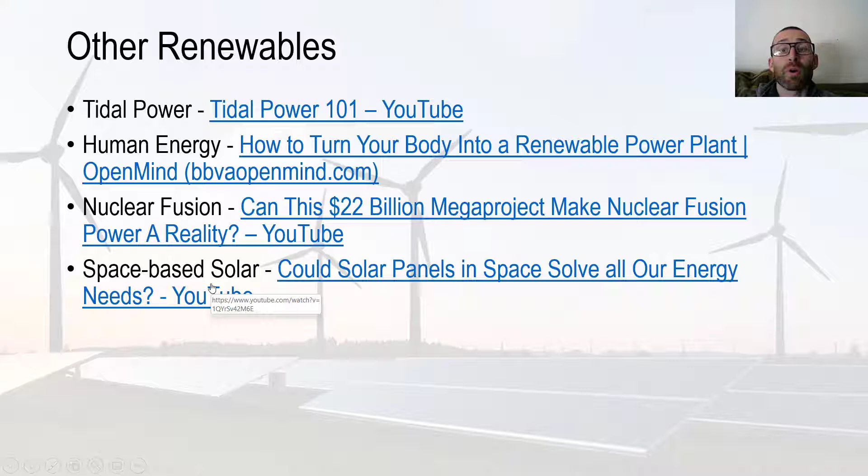As we see with all of these renewables, and as we're going to look when we get into some of the batteries and storage technologies, there are lots of opportunities for different types of renewables and different types of technologies going forward. It's going to be interesting to see what works, what wins, where do we go, what technologies do we settle on. It's a lot of opportunity in the future for anyone interested in this field.

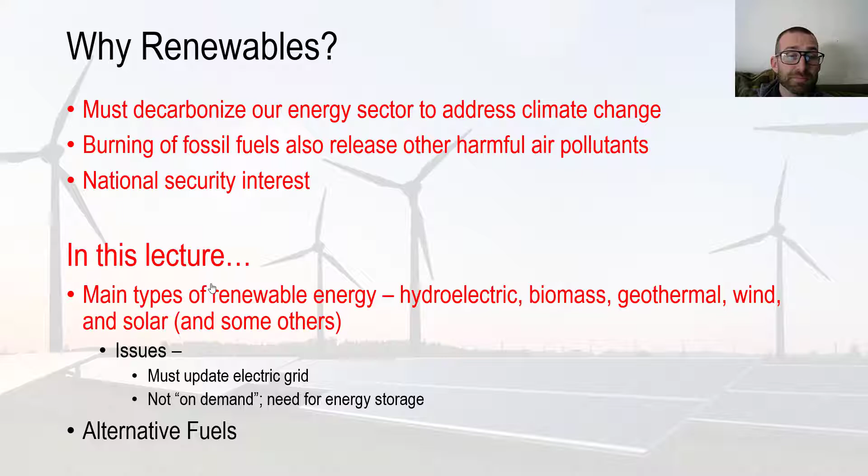So with that, we went through the main types of renewable energy. Now we're going to briefly talk about some of their issues, stuff we've already touched on: we have to update our electric grid to accommodate these renewables, and we need energy storage.

So if we're talking about our grid, we already talked about what our grid was in the last lecture. Some of the issues with it is that it's old—much of our grid was constructed in the 50s and 60s, and it was designed around that traditional way of generating electricity at a power plant, particularly a coal power plant, or natural gas nowadays, having these large-scale utilities generating electricity and then being transported to homes.

But because that grid was designed for fossil fuels primarily, it's not designed for the volatility that we see in wind and solar. Wind and solar are more volatile—when it's very sunny, we're producing more energy; when it's very windy, we're producing more; and vice versa when it's not as sunny or not as windy. So this power grid isn't designed for that.

It's not easy. There aren't quick ways to shuttle around energy where it's needed. And it's also not designed for the increase in electrical usage that we're seeing nowadays or into the future—we have more devices, we have cars running on electricity, so there's a greater demand of electricity upon the grid. And the grid isn't designed to address these new renewable sources being incorporated into it.

So we need to update our grid, and likely what our grid in the future is going to be is that type of hybrid grid I already talked about. So it's not just these several large generating stations, but we're going to have these microgrids—smaller electrical generating stations localized to a certain area, providing electricity to that local area, but also hooked up to this larger grid.

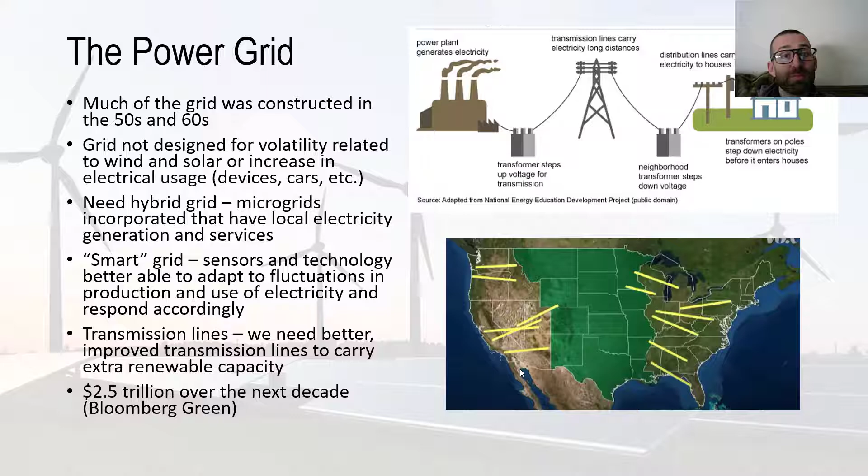All this is going to cost a lot of money—estimated about $2.5 trillion over the next decade, which is a lot. But if you think about the need for this and how much better things would be with this grid, it's worth that investment.

So we need to update our power grid, and we also need to update our energy storage. That was one of the things we saw with wind and solar—there are times when we can produce a lot of energy, and if we have a way to store it, we could use it during times when the wind isn't blowing or the sun isn't shining.

Currently, 96% of our energy storage comes from pumped hydro, which that video talked about. This is where during excess energy you pump water uphill, and when you need that energy, you release the water, it flows through and spins a turbine, producing energy when you need it. The problem with pumped hydro is it requires a lot of land—you need a whole separate system with reservoirs up and down. It disrupts the environment, and it's only functional in certain suitable areas.

So we need different and new energy storage. There are a number of methods being developed, and just like with renewables, it'll be interesting to see which one takes off. One is gravity-based storage—the same idea as pumped hydro, using gravity to create energy when needed. There's a company called Energy Vault doing this.

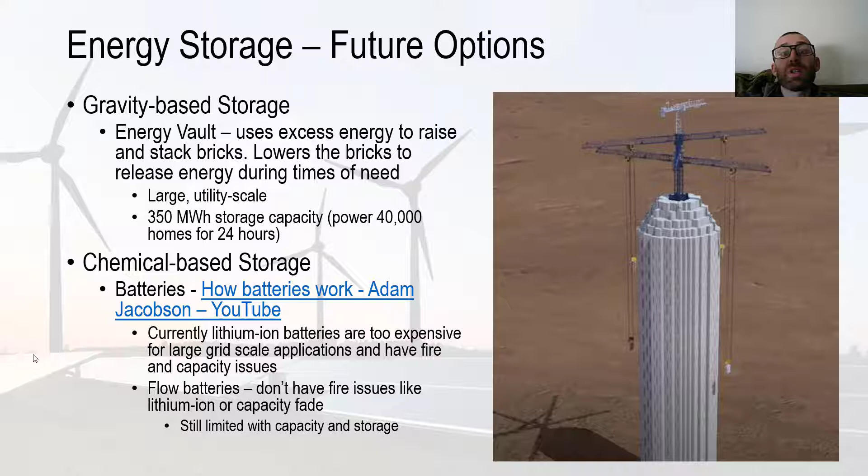So batteries are likely going to be used in smaller-scale systems—maybe microgrid systems or local systems that need that storage, rather than large utility-scale applications.

And then we have thermal-based storage. This is another different type of storage that we may see in the future. What's happening here is that excess electricity is used to heat up materials, these carbon blocks. Then when needed, that heat from those carbon blocks is converted back into electricity using a heat engine.

Traditionally, that would be like a regular type of steam engine, but there are new advances in solar cells that are able to capture the light radiating from these blocks and convert that into electricity. So again, a different option we may have in the future for energy storage.

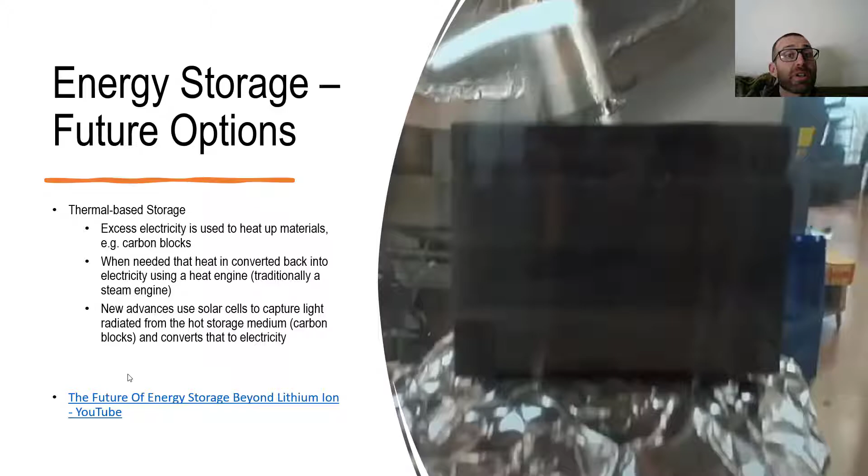We're going to end by looking at fuel alternatives. That whole part was electricity, but again, it's not just electricity that we need to be aware of or concerned with. We have to be concerned with other forms of energy generation, particularly fuel that we use for vehicles. That's a large portion of the energy that we consume, and a large portion of emissions that are produced. So if we are serious about addressing climate change and emissions, we need to look at fuel alternatives that are more environmentally friendly. We have a couple different options.

One of which is to create hydrocarbons using carbon dioxide and water. So instead of taking our hydrocarbons from the earth, pumping for oil, we can create hydrocarbons from existing carbon dioxide that is in the atmosphere. And we can fuel this process using renewable energy.

This way, we are essentially carbon neutral, because we're taking carbon dioxide from the atmosphere, we're using it to create a fuel, and then that is getting burnt off, and that carbon dioxide is getting released back. But it's a cycle. So what we are taking in, we're then emitting - carbon neutral.

This would still likely have other types of emissions with this process, but in terms of addressing carbon dioxide, this would be a neutral way of going about fuel alternatives. And there are many people who are looking to do this and trying to figure out ways to do this.